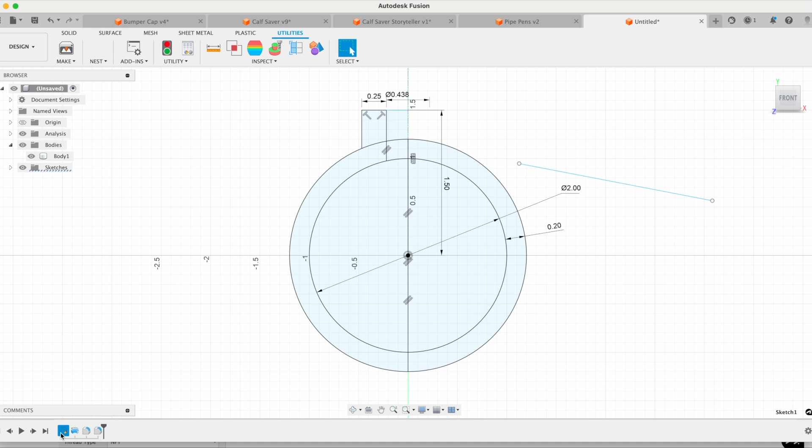All right, so this is a project I've wanted to do for quite a while, and this is just kind of the first in the series. But everything around my design, often I like making items that go in the water, are for scuba diving or boats or other things. One of the things that we need to do is figure out how to make items watertight. And so I've scoured the internet, scoured YouTube.

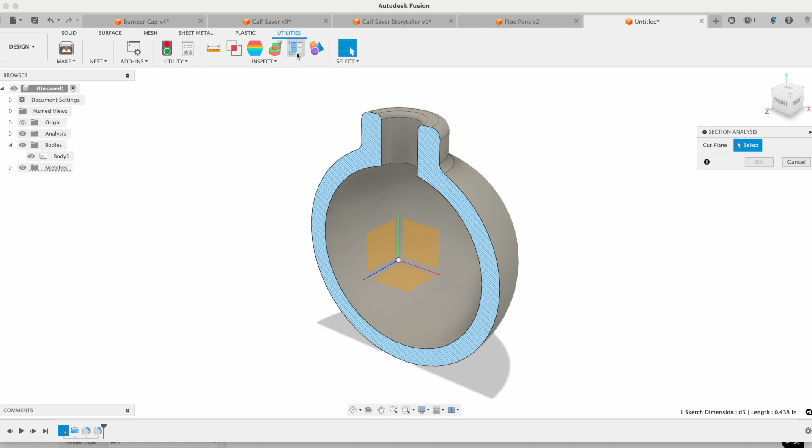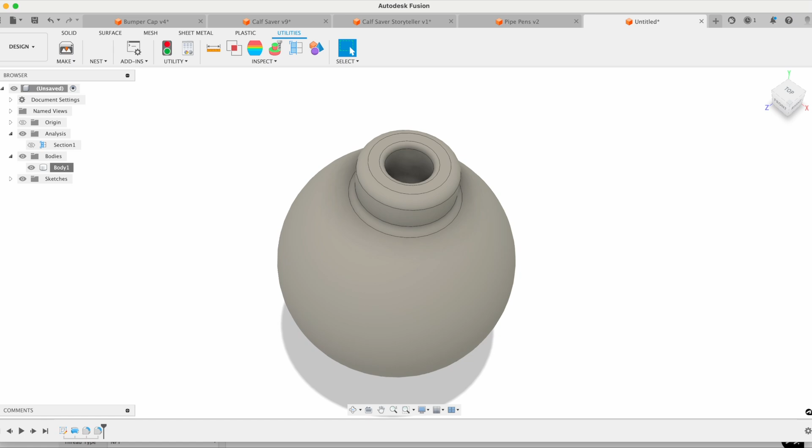Everything I can find on watertight 3D prints has pretty much been focusing on coatings that you can put on FDM prints. So I was trying to figure that out, realized that really wasn't what I wanted to do. So I designed a pressure vessel, as you can see in Fusion 360 here, exported it, and I decided I was going to go outside the normal and I was going to go ahead and resin print it.

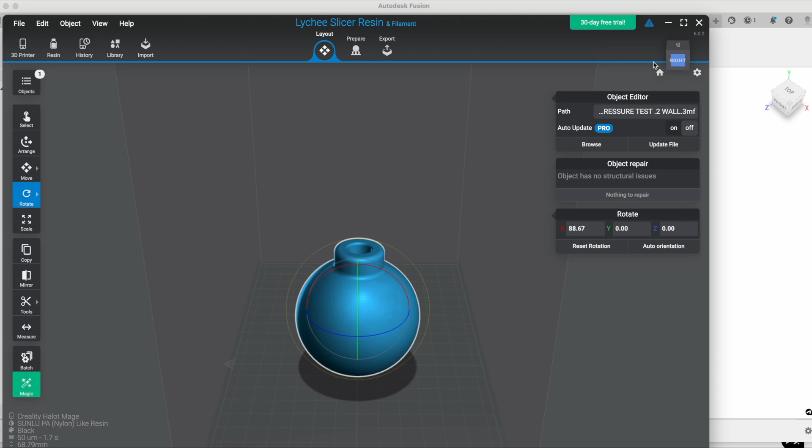So I use an nylon-like resin from Sunlu, and I wanted to see, could I actually hold any sort of pressure in a vessel? And if I could hold a pressure, what was that pressure? And what were my failure points? You know, is this a one-step project where it's going to work the first time? I highly doubted it. I expected to have leaks all over the place. Or is this something where, you know, we go through multiple iterations and try and get it working?

So this is beginning the resin print here. I used, again, my Sunlu nylon-like resin.

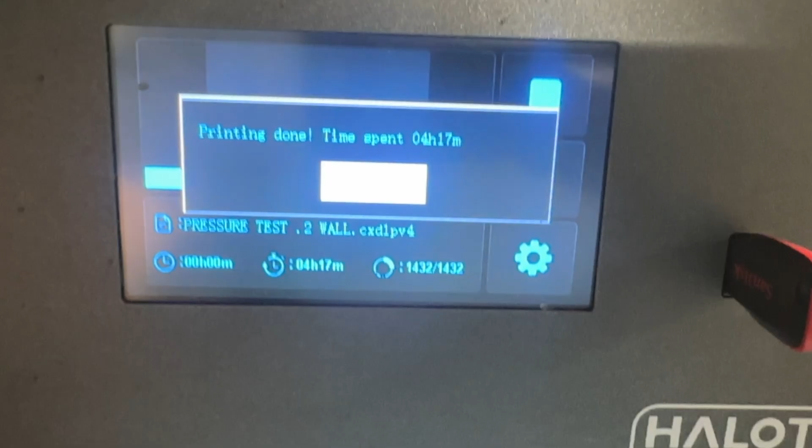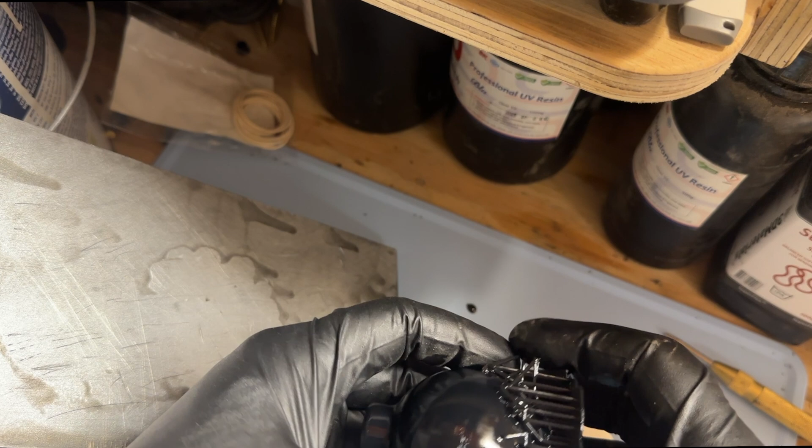So 4 hours later, my part was done. Just went ahead and peeled it off of the build plate here, and it's one of the most satisfying things to take a resin print off of the build plate and just hear that Velcro-like sound. When I had this part, before it was cured, I put it in the resin washing station.

And yes, I know my washing station is extremely dirty. I apologize. I just haven't had time to filter it out and get rid of all the gunk and sediment that's settling in there. So feel free to comment and criticize, but it is what it is.

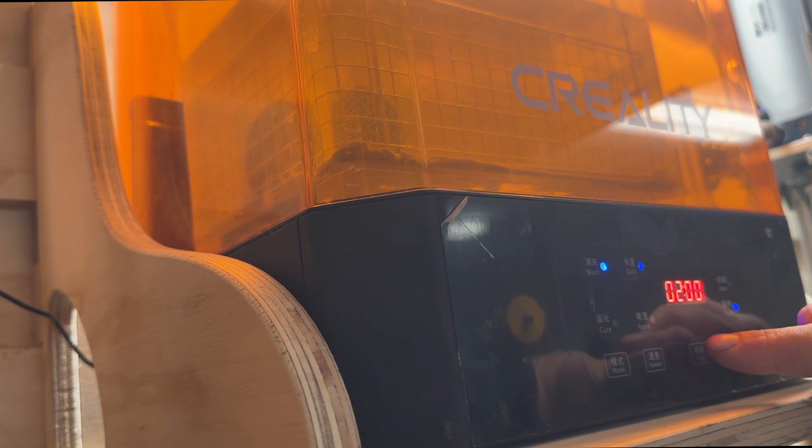One thing I will say is when printing a hollow sphere like this, I had to make sure that I got the isopropyl alcohol inside of the sphere, and then even after I was done rinsing it, I used my gloves, filled it up half with isopropyl alcohol, half with air, and so I was able to shake it and get a lot of agitation on the inside.

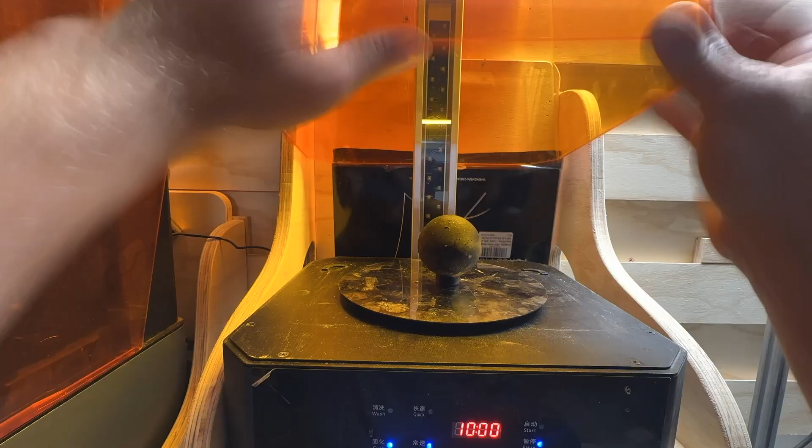All right, so now that we have this 3D printed, I know it looks like, my wife texted me today and said, did you make a cartoon bomb? I'm not trying to make a bomb, I just wanted a pressure sphere. Try and say that 5 times fast.

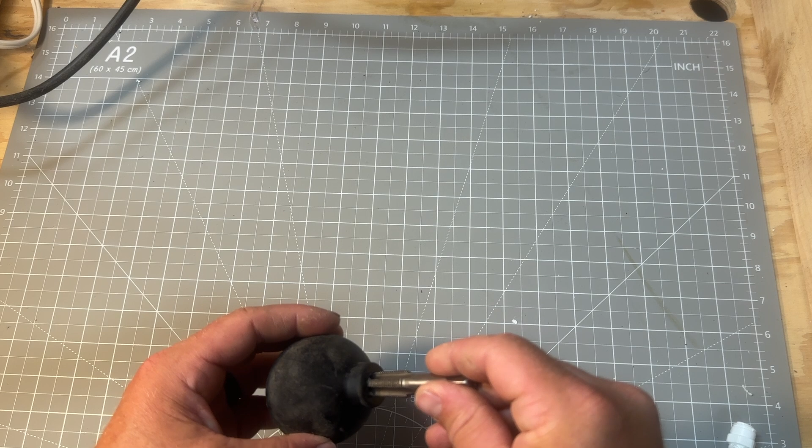So what I'm going to do is I'm going to take the pressure sphere, and then for a couple bucks off Amazon, I got a 1/4 inch NPT tap, and so I'm actually going to attempt to tap this resin printed product, and then we're going to thread in a pneumatic fitting, and we're gonna see if we can hold some pressure with this thing.

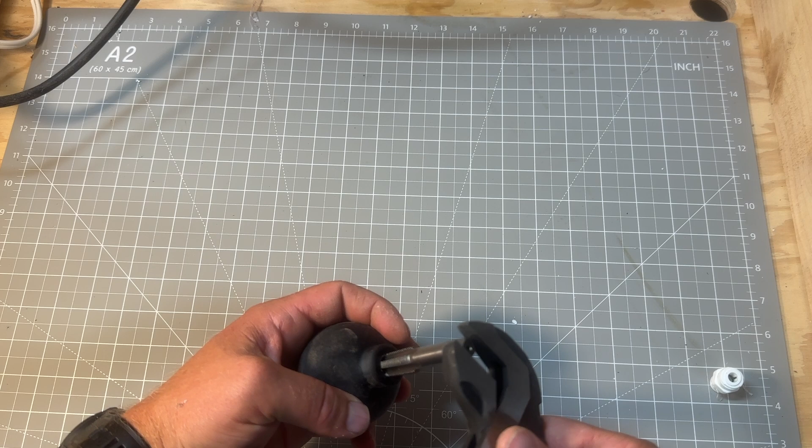So sorry, I don't actually do large diameter taps that often, so I'm probably gonna make a mistake, and I definitely don't have the right tap holder. So I'm just gonna give it a shot. It appears to be going in, so let's keep going.

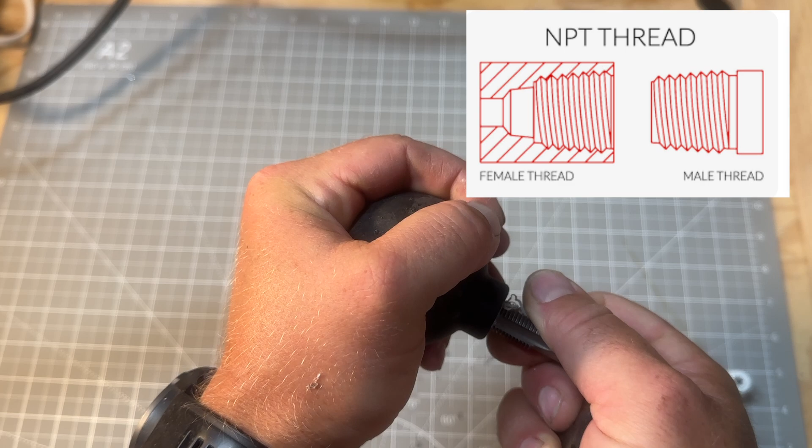So with the NPT threads, they're actually a tapered thread. So it's very loose when you first start threading in your fitting, and then all the threads touch and get tight at the same time. So let's see what that looks like. So it's actually getting there. I might do a little bit more just to get it down to the bottom.

Yeah, since it's a resin printed part, I'm sure there's some sort of cutting assistant fluid or something that I could be using. I don't know what reacts with the resin, and I really don't want to mess this guy up just by adding the wrong cutting fluid to it.

Little pieces hanging out in there. Doesn't look half bad. Let's try and use a little tubing, get some of that out. All right, so now I have a 1/4" NPT little fitting. So we're gonna go ahead and put that in.

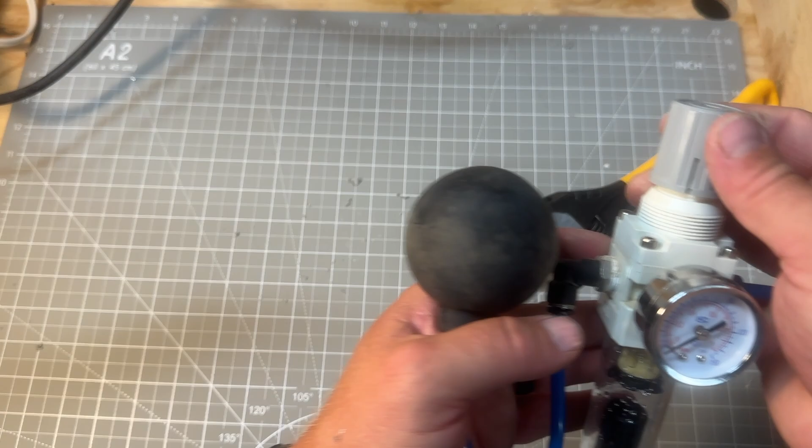So we're just gonna do a little bit of a pressure test to start. To be honest, I took this off the laser machine, so it's not supposed to be used for this. So when I go higher pressures, I'm actually gonna fill it with water before doing it to make sure that if it explodes, it's not going to destroy me. And then it would be a little cartoon bomb. Okay. So there we are.

20 PSI. 20 PSI, let's go up to 30. Feels like the whole hose is getting stiff. So 30 PSI is pretty good. That's 2 atmospheres. If I were in a pressure chamber, obviously this is backwards, but if I were to take this underwater, 30 PSI is about 2 atmospheres, a little over 2 additional atmospheres, so that's the equivalent of like 66 feet deep.

So I'm actually going to get a fish tank, put this thing underwater, see if it bubbles at all. Boom! Thank you, betta fish, for not surviving too long.

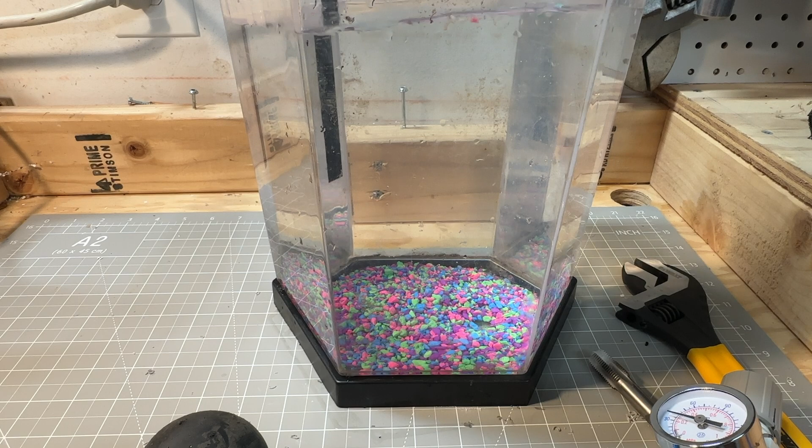Okay, so I'm going to bleed off the pressure from this. So now we're all the way down at 0. We have our sketchy cartoon bomb. We're going to drop this in. Let me reposition this guy so we can see it a little bit. Okay. So right now, obviously no leaking, 0 PSI.

I'm going to go ahead and go up to 15 PSI. That's 14.7. That's 1 atmosphere right there, 1 additional atmosphere, so that's the equivalent of like 30 feet. 20 PSI, just shy of 30 PSI. That's 66 feet of ocean pressure if it were coming from the outside. I know this is going inside out, but still no leaking, 100% airtight, which is pretty crazy.

So now we're gonna go up to, let's see what we can do. That's 40, 45. So that's 3 atmospheres. That's nearly 96 feet, 99 feet. Four atmospheres. It's equivalent of 120 feet, somewhere around there.